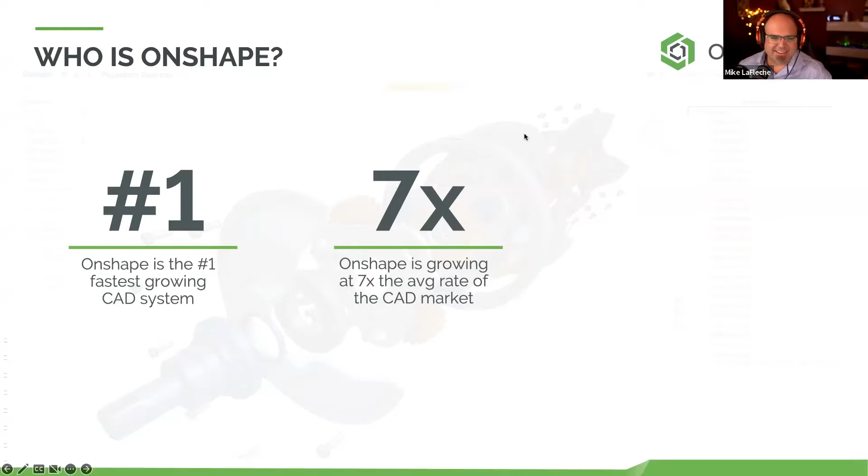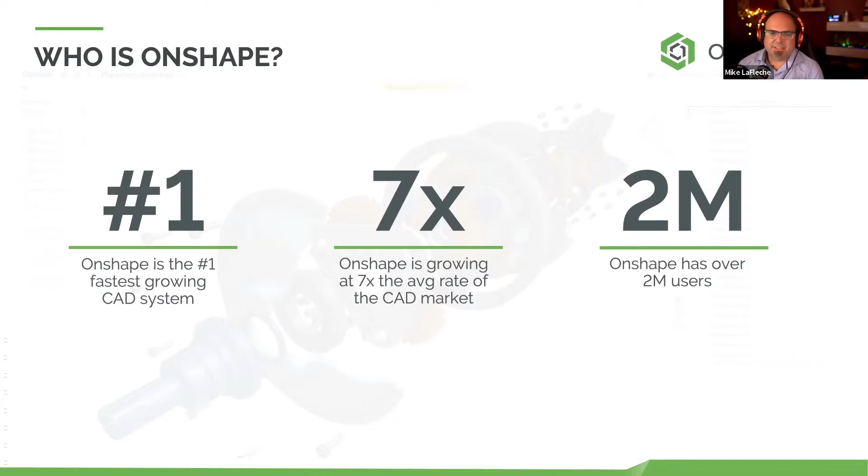Onshape's growing 7 times the average rate of the CAD market as well, kind of feeding into that last theory I just presented. That all adds up to 2 million plus users of Onshape across all industries, from all parts of the world. Many of our customers come from other CAD systems as well, people that have desktop installed CAD systems come into the Onshape ecosystem and have a lot of fun with it.

So let's talk today about why companies are switching to Onshape. And Mike, you being the PLM expert here, there's lots of reasons why people buy PLM, right? Maybe you want to remind us just a little bit about where PLM plays, and then I'll talk a little bit about where the MCAD and PDM kind of play.

Yeah, thanks for the question, Mike. So you mentioned MCAD, and in a lot of products and most products in our community, there's MCAD, there's ECAD, there's software, there's packaging, labeling, artwork, and documentation. That's all part of one big bill of materials.

And so the transition then is on the MCAD side of things. You've got your bill of materials that combines with all of these other elements in one system to manage the whole product definition throughout its life cycle.

Exactly. So yeah, definitely where Onshape is playing, it's the CAD system, but we rethought the way that files and data flow throughout the organization, and we'll show that to you in a demonstration today. We've been able to come up with a way of combining the CAD and the PDM together. Instead of PDM being that separate piece that people are used to installing and managing separately, that is part and parcel of the whole Onshape system.

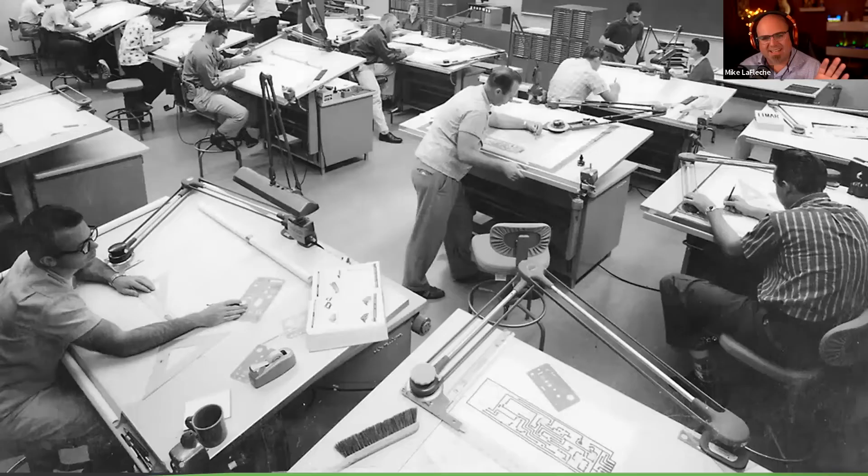So in Onshape, you're always working on the latest version. You have named versions, and we'll talk about this during the demo, but you can actually stack work together. And the reason why you can't do that in most CAD systems - I think Onshape's probably the only system that allows for this truly concurrent way of working, not waiting for people to finish their job before you can do yours - is because all the CAD systems we use today were based off of this picture.

Okay, I mean, I started on a drafting board. That's where I started in school, and that's where I learned how to get into the whole engineering world. So this is kind of a fun picture to look at, but I certainly wouldn't want to work this way nowadays.

Everybody has a drafting table with their drafting tools. You have flat file cabinets. You have an engineering manager back there, a document administrator back there making sure the engineers are doing the right thing with the drawing they're working on. They take it out of the flat file drawer, note who took it out and when, take the drawing over to the blueprint machine, make a copy, and put it back in the drawer so they have the latest version stored away. The engineer takes the piece of vellum, gets their eraser shields out, makes their changes, and then gives it back into the filing system.

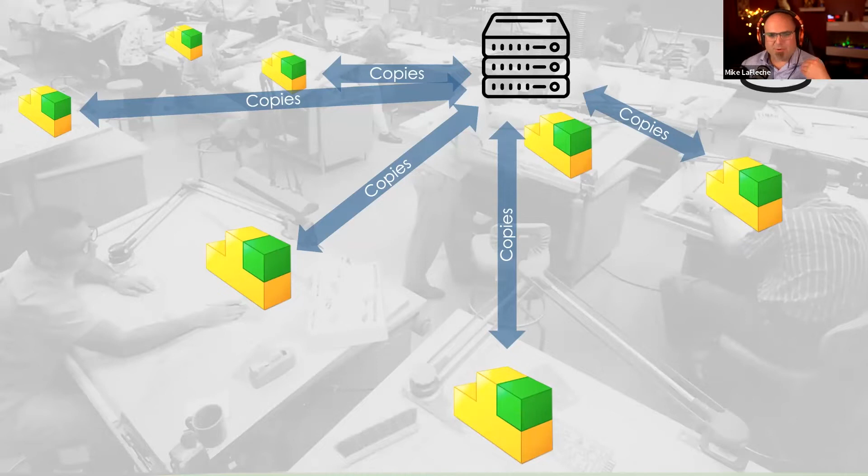And all the CAD systems just kind of duplicated that process, right? You think of C:\Windows file management. When you're dealing with files, especially big, large CAD files, you have to make copies and have them on your local desktop to make those changes. And when you have changes on your local desktop that need to be sent back to the server, that's called a check-in operation or a save operation, but only one person at a time can do any work, even on your top level assembly.

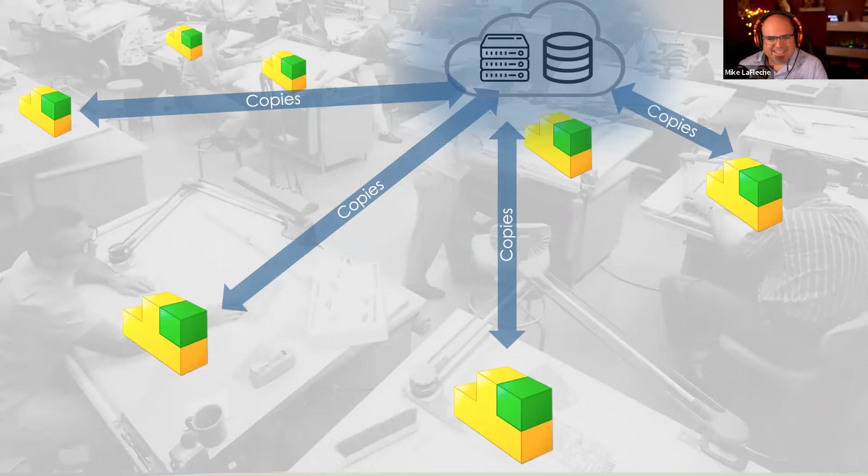And by moving the issue to the cloud, moving the servers to the cloud, that actually doesn't help. You would think, why would I say that? Onshape, it's cloud native. But moving files to the cloud isn't going to solve anything. It's actually going to make the problem worse because the files are big. You're sending them to some faraway data center over the open internet, and it's a huge amount of data going back and forth. Your IT department will look at you really funny when you make this proposal, because it's going to cost a lot for data access between different sites. I've been involved in these discussions, and it never really goes the way people hope they thought it would.

So you could truly have a concurrent design process if you get off of this file addiction that we have as people, right? So if you go to things like Google Docs, do you deal with files at all? No, you just sign in, you have your documents, you share them with the people you want. You can even work together at the same time in the same Google Doc. You've all had that magical experience.

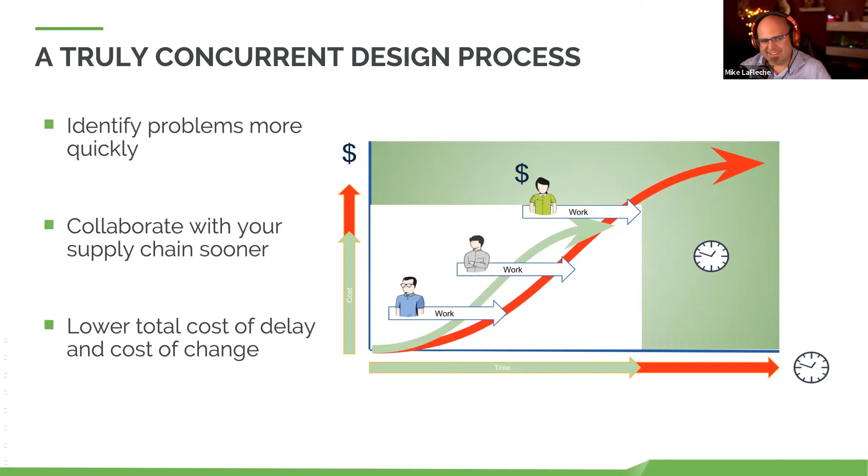So today, what I want to do is show you a little demonstration of Onshape, but I'm also going to show you a demonstration of Onshape connected to Arena PLM, seamlessly. So fasten your seatbelts. It's going to be a fun time, and we're going to have a lot of fun.

So Onshape, cloud native design. We have obviously a CAD system, but PDM is built in. So what does that mean? Let's just slide out of this slideshow here.

And here I am on my MacBook computer, as you can see. I have a phone over here, I have a browser window here, I have another one here. Let's just start here, Chrome browser, right? Nothing special, except that it's a web browser. And here I am inside of Onshape, signed in as a particular user. And here I have a game controller that I've selected, and here's the version history of this.

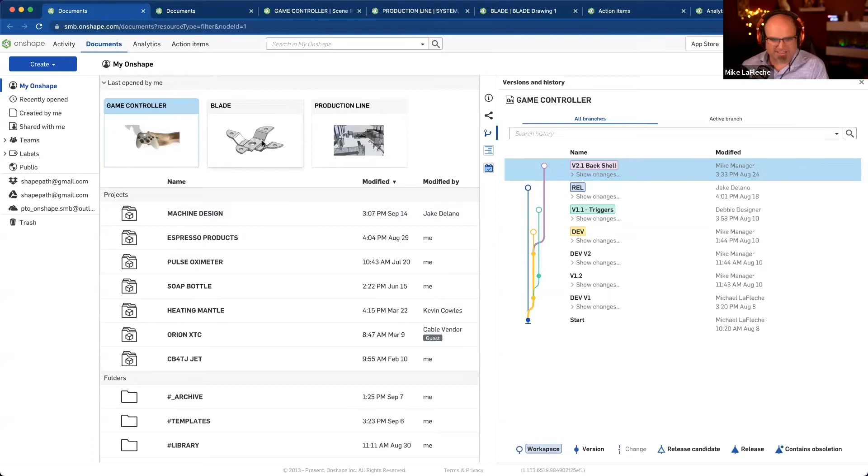How would you actually work in a system like this? We'll give you the story here, but know that Onshape can create parts, assemblies, drawings, renderings. It is a CAD system. So here's an example of a great rendering of a game controller. Here's an actual assembly that I'm going to work through. And I'm just going to zoom out just to kind of show you.

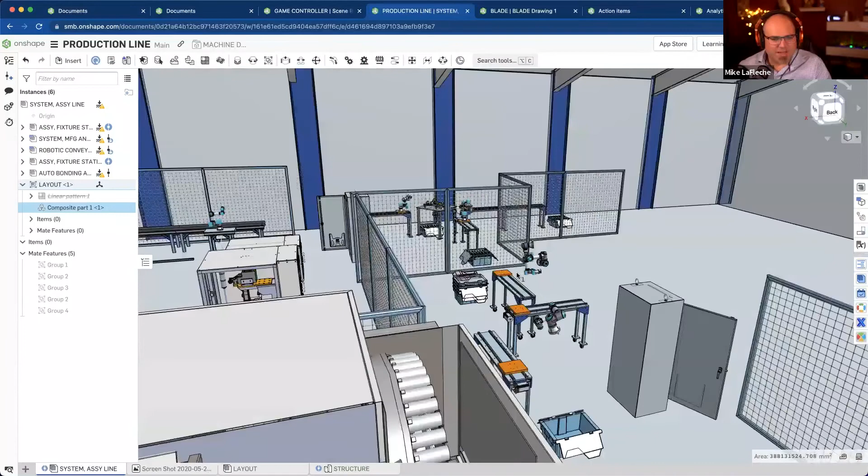A lot of people, when they think of a cloud native system as far as 3D graphics goes, they get a little scared at first. And the reason is because it's an experience they may have had in the past with what a cloud system could be for 3D graphics. Onshape breaks all the rules of 3D CAD as far as the way data is handled.

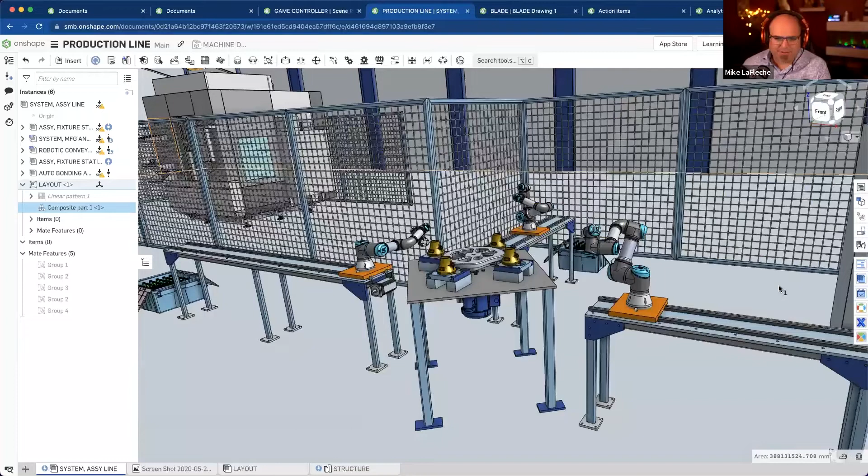You don't have to worry about getting files down to your computer, nor are you streaming anything to your computer. Like, obviously we're in a webinar right now, and that's being streamed to you. But working in a CAD system that's streaming would not be an ideal experience. You'd get dropouts, you'd get pixelation. It would be like watching a movie on an old hotel Wi-Fi connection. It just isn't a fun experience. So Onshape did not do it that way.

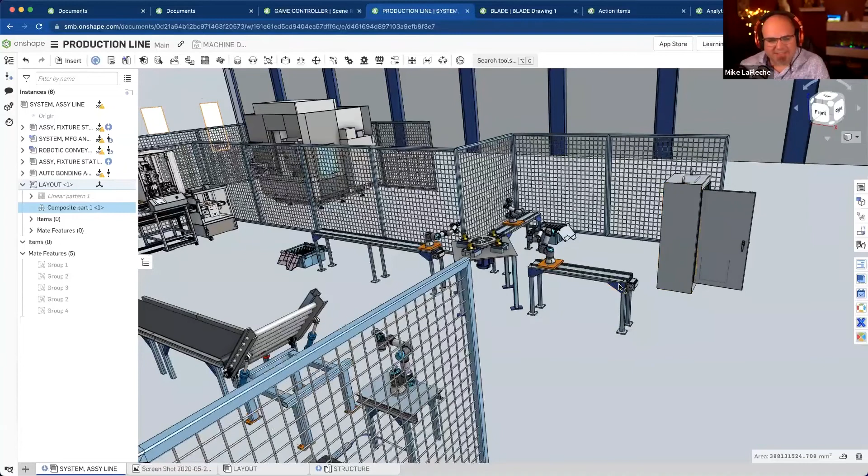All of the data that's needed to construct these 3D graphics in Onshape live in front of you, the browser knows how to build a 3D model. We're just taking advantage of that. So that's the secret sauce of Onshape: when you're working with it and you're clicking the buttons and interacting with the graphics, these are graphics on your computer that the browser rendered locally. So that's why it feels fast. It's not going to feel like an old kind of pixelated experience.

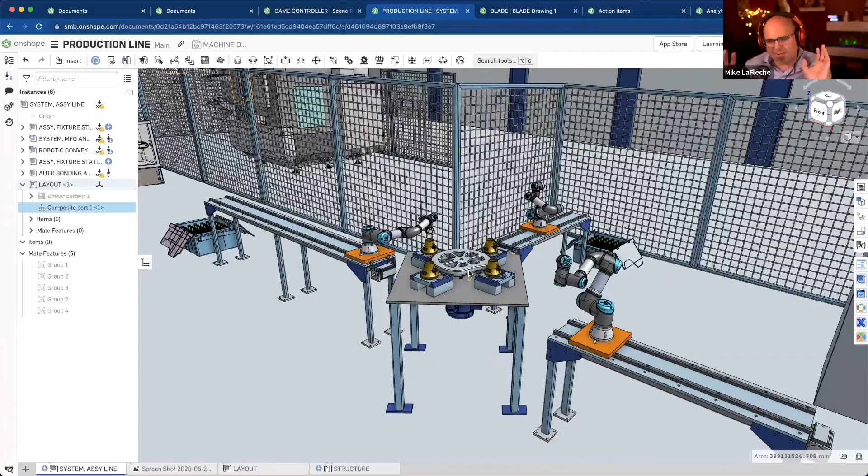And you're going to be able to make assemblies, parts, drawings. Here's like a blade off of a coffee grinder here. But you also get the added benefit of really amazing collaboration here. Here's some comments and tasks. Here's some analytics about what's going on in my engineering department. So for the first time, you're able to understand what's really going on at a company level, down to things going on in your engineering and design organization, much like you would with Arena PLM, right?

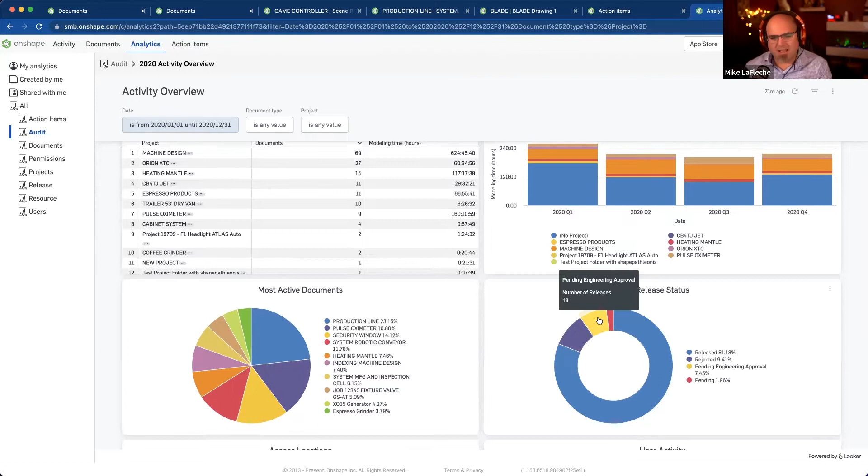With Arena, there's all sorts of analytics and reports. You can probably search for anything you want in the system and get data out of it, right? Absolutely. Same is true with Onshape, but to a degree never seen before in engineering. I can see where my most active documents are, my internal release status for workflows in the engineering side of the business. I have 19 releases pending approval that need to get into the rest of the company and into Arena.

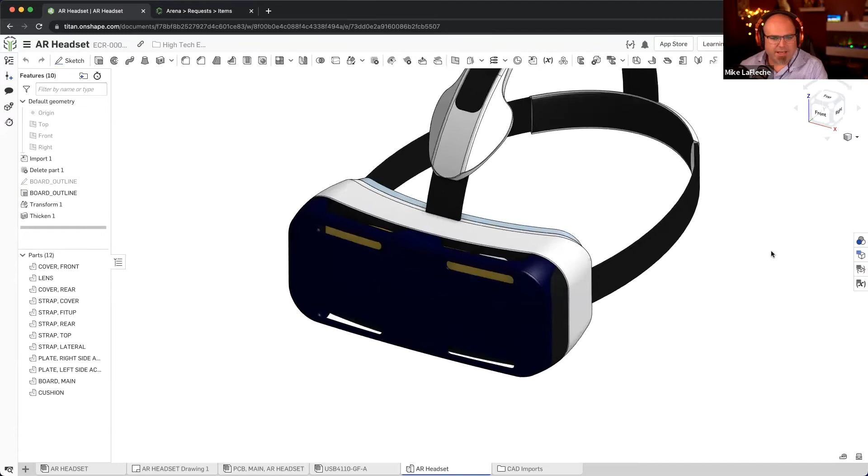So how would I work in a system like this? I have this headset here that I'll work through. You can see how fast Onshape works, right? We're able to jump right through and see the design. There was no waiting or delay as I opened up that design.

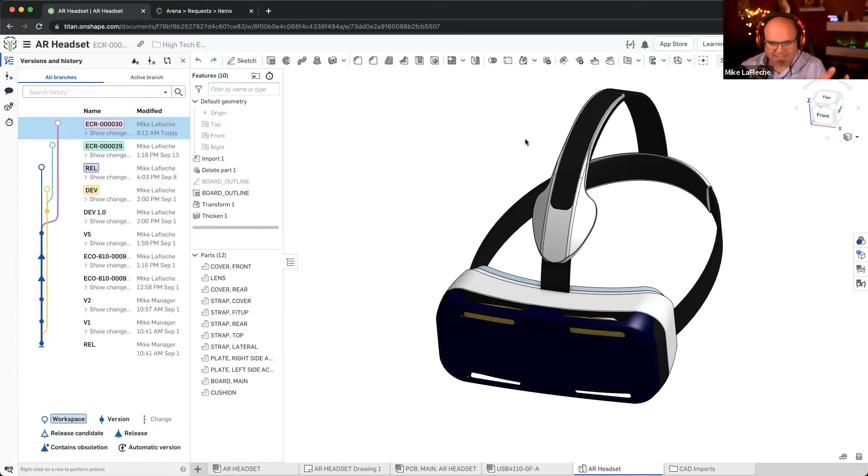In Onshape, you create these things called documents, and a document can have parts, assemblies, and drawings in it. It frees you from having to think in the logical C:\files way of thinking. You don't have to do a lot of pre-planning because of that.

Since you're all probably engineers on this call, you want to see how this works. You create a document—let's say I wanted to create a bracket system. I didn't tell it how many parts, assemblies, or drawings I want. It just put me into a part studio, into a very familiar looking environment.

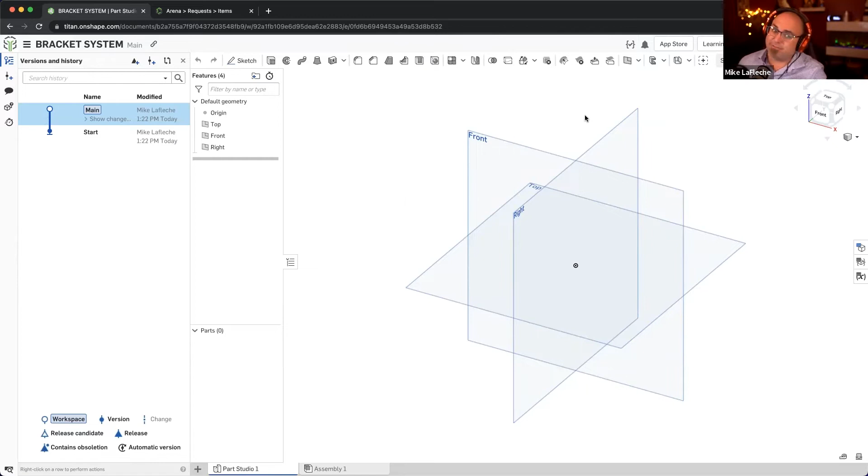And then you just start sketching. So I want a 5-inch by 4-inch rectangle. Nothing earth shattering, except we're doing this in a web browser on my MacBook computer natively. I'll extrude that 1 inch.

Turn off the planes with keyboard shortcuts. I'm going to create another extrusion, and I'm going to tell it to be a new part. This is where we start getting different, because the database is keeping track of everything that's going on. Here's my base plate.

Just like that, I'm renaming the part. And then right here, we'll call this the top cover. Very easy to get started.

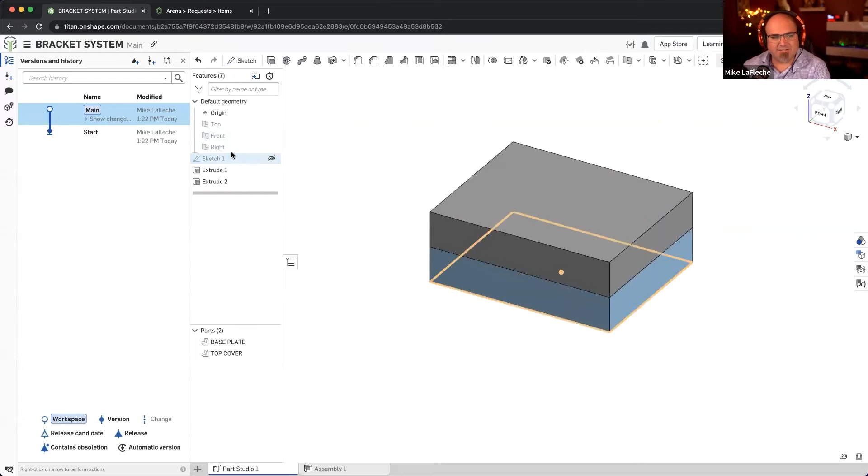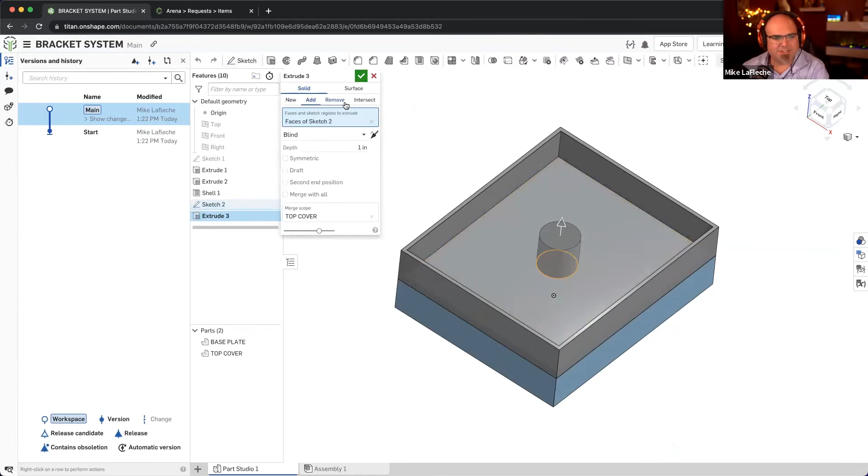Of course, everything's parametric, sketch-based modeling. If you make design changes, you see everything updating. You're able to drill parts through multiple places, hollow this part out and that part out. You want to drill holes through, sure, go for it.

It's all what you're kind of used to in a parametric, feature-based design system. So I just drilled through the top part, but not the bottom part—that's what I told it to do. And this whole time, I've been keeping track of it.

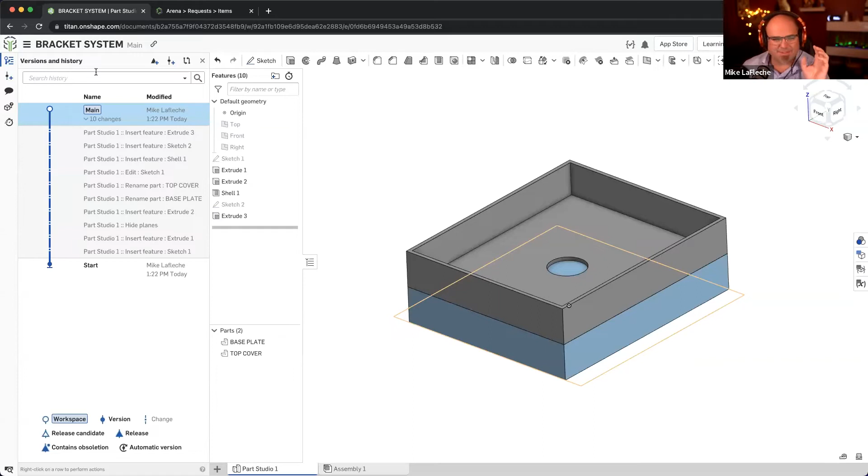You notice that I'm purposely waving my left hand the whole time. I've gotten into this habit when doing a demo, because usually your right or left hand—I'm right-handed with my mouse, though it's reversed on the computer, probably because of the video—this hand is free to move about the cabin. Meaning I'm not hitting Control S on my keyboard every time I'm making a change. That's something very freeing. I'm able to use this hand for drinking coffee, drinking water, or just waving at you, because everything is being recorded.

We can label versions in time for important points during the design process. This is just version 1 of the design—we're not releasing it at Rev A yet. We're not ready to go to manufacturing yet, but we have an important milestone in the design. So that's kind of how it works.

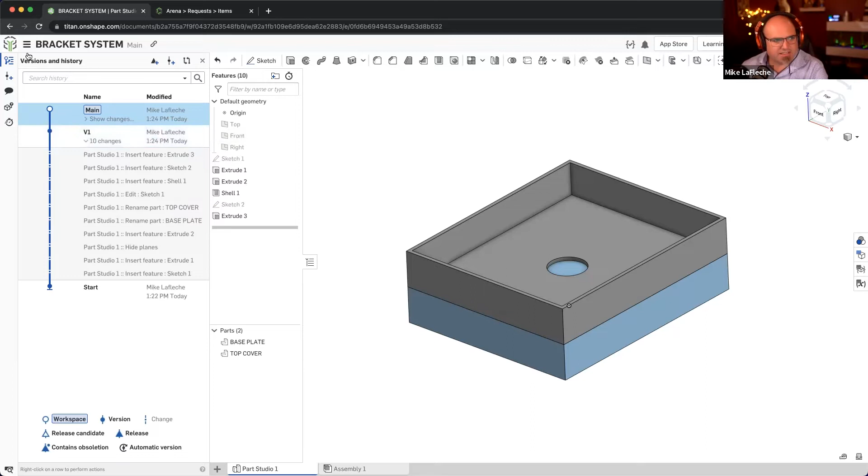So let's just go back—click out of there, go back to the headset. This is what we're going to be building. I want to build this cushion here. So let's go to a fresh document. I have something ready to go here.

Do a VR headset instead, right? I think this is more of a VR headset anyway.

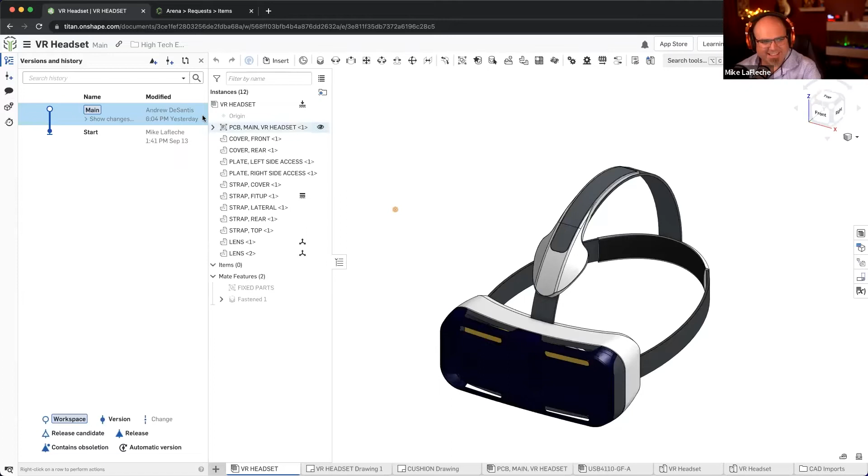In this design, I have a comment from somebody here in Arena—we have an engineering change request. I've been learning Arena thanks to the help of Mike and friends over on the Arena side of the business. I have an engineering change request here in my Arena instance, and an item number related to that change request. So this ECR, I actually want to use as a way to make the proposed changes here in Onshape.

You can see that this is showing—let me just go back here and look at this. Early testers have said that the headset's uncomfortable. A cushion of some sort might help with this headset. So here I am.

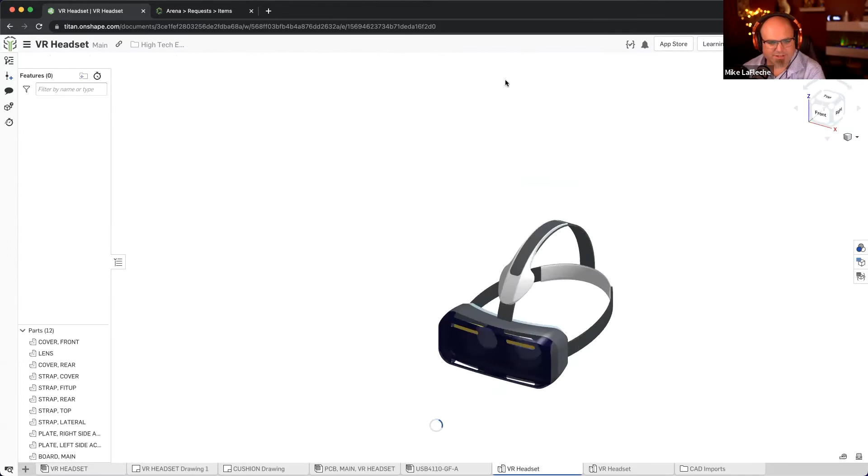Here's an assembly, and here's the part studio inside of Onshape. Let me create this from scratch for you. All right, so you can see my timeline here.

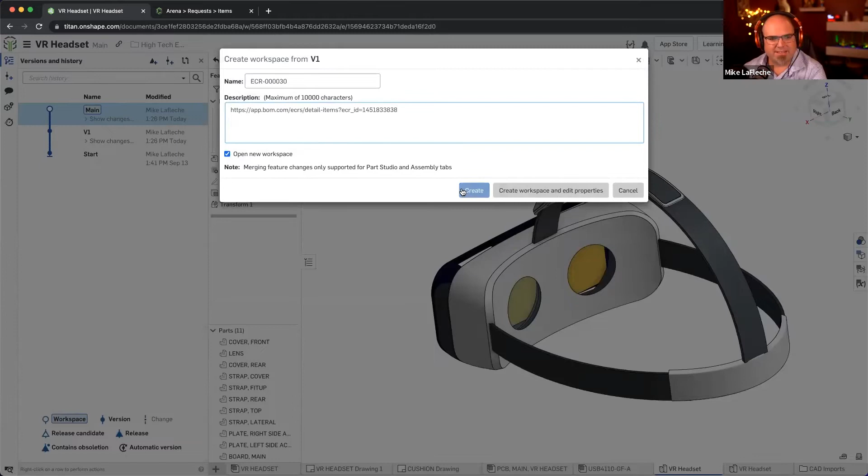I've made a few changes. I'm going to create a version here in my timeline, and create a branch from this point, calling it out as the engineering change request from Arena. I could even put a link in the description back to that ECR. But instead of doing a file save-as copy or a pack and go like you would in SolidWorks or any other file-based CAD system, here I'm creating a logical branch in time to make these proposed edits, instead of doing it on the main timeline.

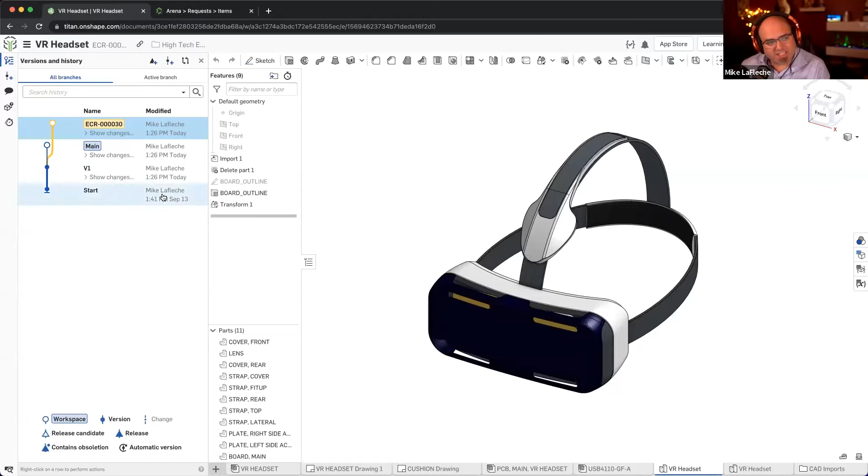For the engineering change request, we have the action. Mike, this looks like a pretty good opportunity to add a cushion here and here. This is Onshape, and it's pretty easy to do this, right?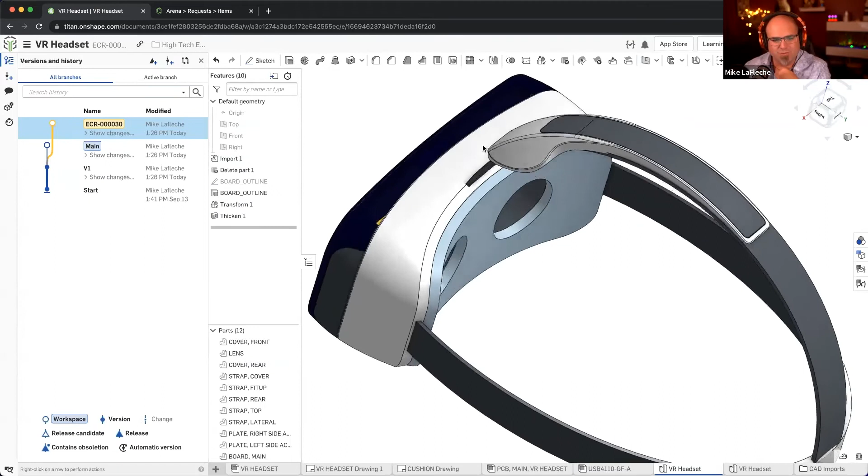I'm just going to create a new part that thickens the surface by 5 millimeters. Hopefully that looks a little more comfortable. Maybe we should round it off, huh, Mike? We'll go ahead and make this change, make this 2 millimeters, or I'll go at 1. That looks pretty good to me.

All right, so we have that fillet radius in here, and we have this part that was just generated in this parts list. It's automatically giving me a new part. I didn't have to create a new item record or anything like that—it just does it for me because I told it to create a new part when creating the thicken.

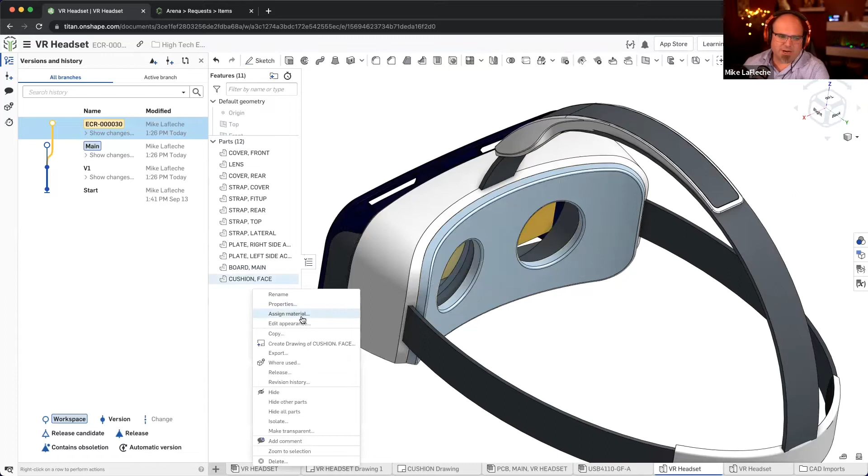And we'll call that the cushion, comma, face. Let's see, we should probably make this out of something. We'll make it out of some sort of rubber. I'll filter it on rubber, and it shows me all the rubbers in my database here.

I'll say it's made of neoprene, so I get the right density. In fact, in Onshape you can pull out these special tables that will give you an idea of how heavy all the parts are in this part studio, and I can see everything has a weight except the circuit board, which I haven't finished yet. So the cushion—I can see that it's right here, made of neoprene.

The other thing I need to think about is, where are we going to get a part number? What's the category of part? This is very familiar if you're an Arena customer, categorizing things in the system. Onshape has a similar categorization function, and I want to make this out of some sort of fabricated—I guess plastic would be the category for a rubber piece.

Onshape has a part number generation capability built in, and this is something you can set, but it's a very simple part number, serial number generator—it's not looking at the category. Arena PLM does have sophisticated automatic part numbering based on category, and I can click on that hashtag right there, and it gave me the next available part number for a fabricated piece of plastic from Arena, right?

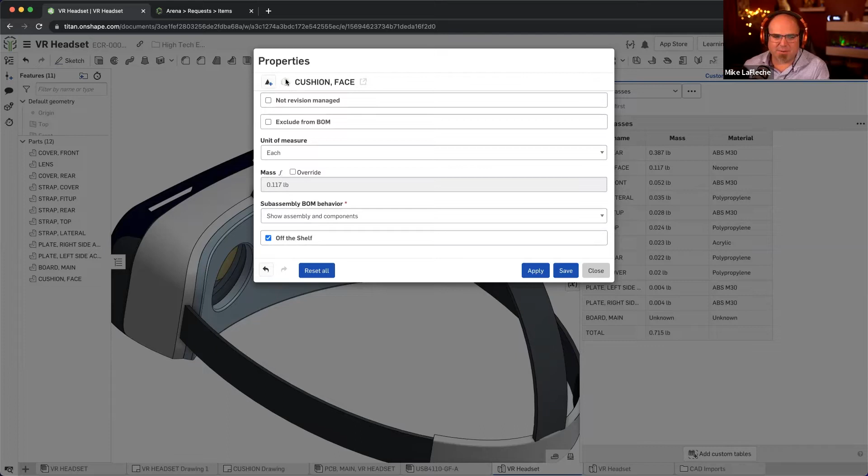That was pretty easy. I didn't have to type in a number, making a mistake. Everything's here—all my other properties are here as well, automatically being calculated. You can customize these in Onshape, of course, as well. But you want to have the properties that are good for MCAD here, the properties that are appropriate for the rest of the enterprise and Arena in Arena.

So I'll just apply that change. The cushion, face cushion's here—we got a part number. And by the way, if I go back to that property screen, look at what we have up here: we also have a sync to Arena button.

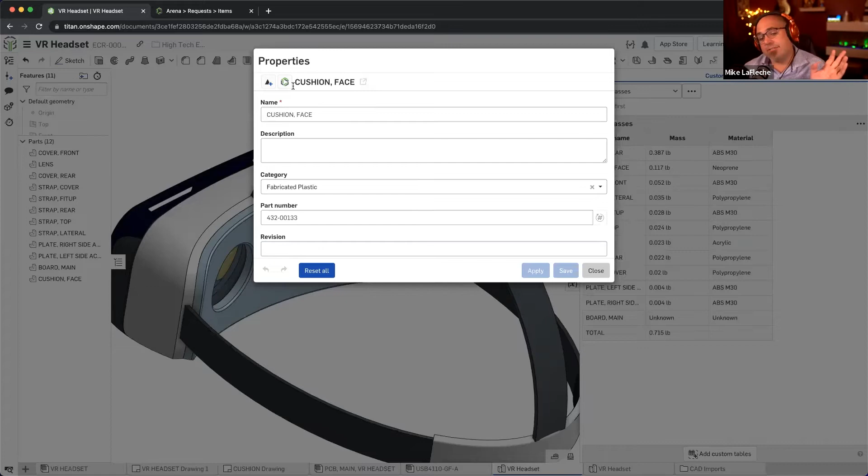And what that would do is take this current state of the face cushion with the part number and category and just stick it in Arena, right? I could do that right now if I wanted, but I'm going to wait because I have a couple other things I want to do with this.

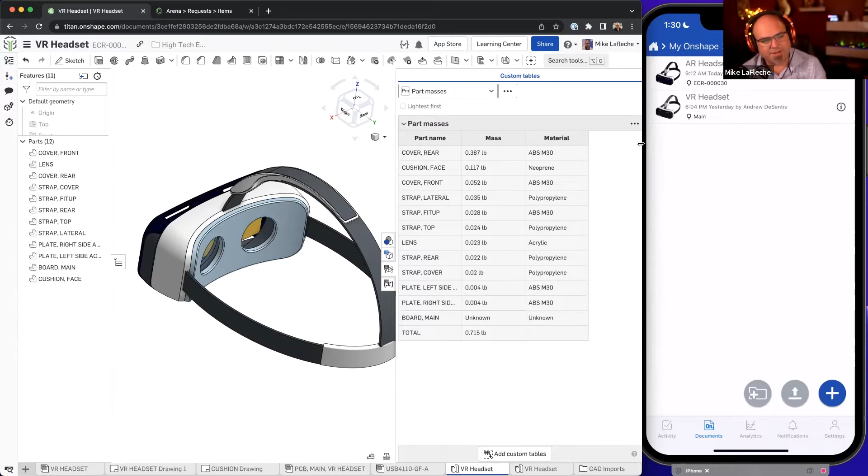Let's go to the assembly. Actually, before we go to the assembly, I want to get some feedback from a design colleague who's out in the field. So Mike, I'm going to pretend you're out in the field and I'm going to give you an iPhone. This is my actual phone, and I have an app that I can broadcast my phone to the screen here—that's just for the sake of movie magic here, right? But I'm really operating this. So I'm going to go to my VR headset, and we can pretend that's Mike. But look, I'm able to get to this on my phone.

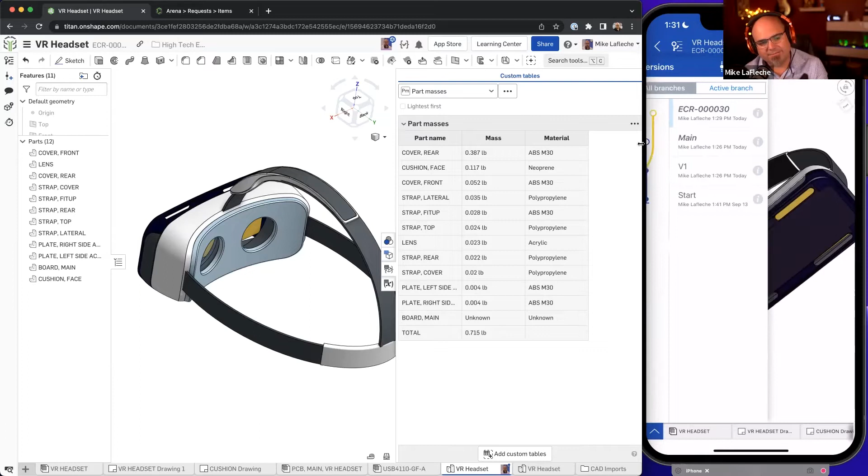Full CAD system, full PDM system on my phone. I have the full history. You can see that I'm in that ECR 30 that we had defined in Arena, right? And I can even see the other people in the document.

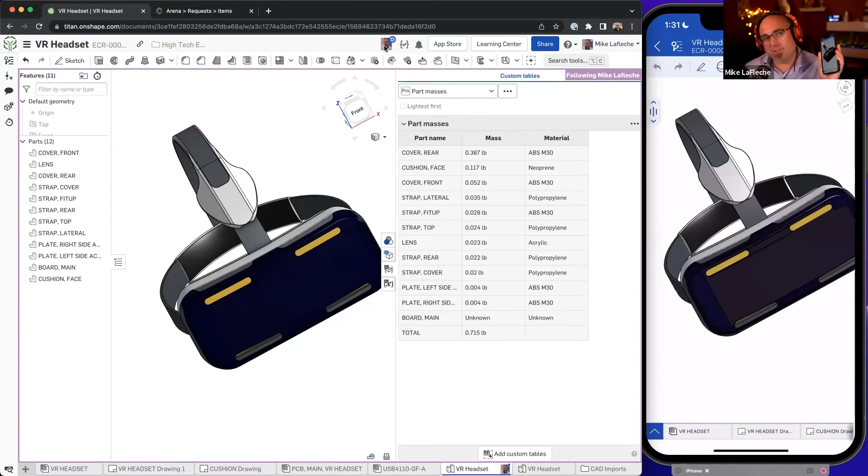There's a little note here that we have another collaborator. If I really wanted to see what the person on the iPhone was looking at, I could double click that person's head that appears at the top of the screen here, and you see the view position changed automatically.

And this is now a live design review, right? So what was the first time you saw this, Mike? What were your thoughts when you saw this follow mode in Onshape? So obviously something very cool. The first time I saw this was over 10 years ago.

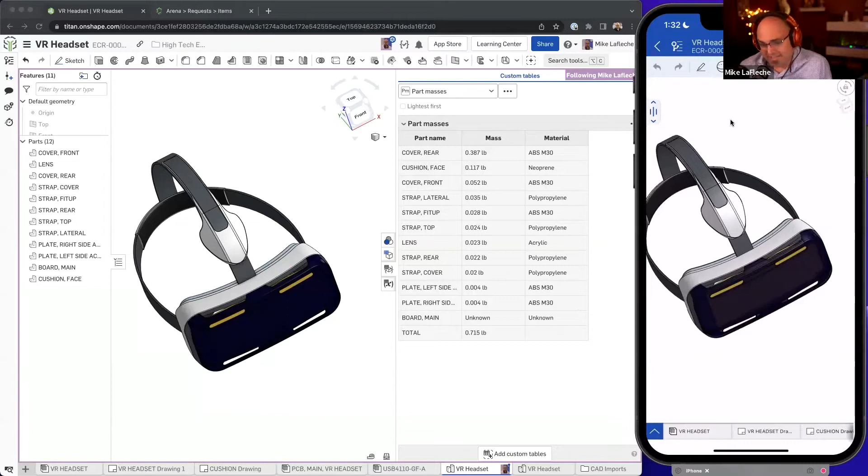So this has been built into Onshape right from the beginning. We built the kind of infrastructure of Onshape first before we started building up all the CAD functions. We had to build the foundation, and these design review functions are amazing for design reviews, interacting with your suppliers, customers. You could be out on the shop floor, as long as you have some internet connection, whether it be 3G, 4G, Wi-Fi. It doesn't need much.

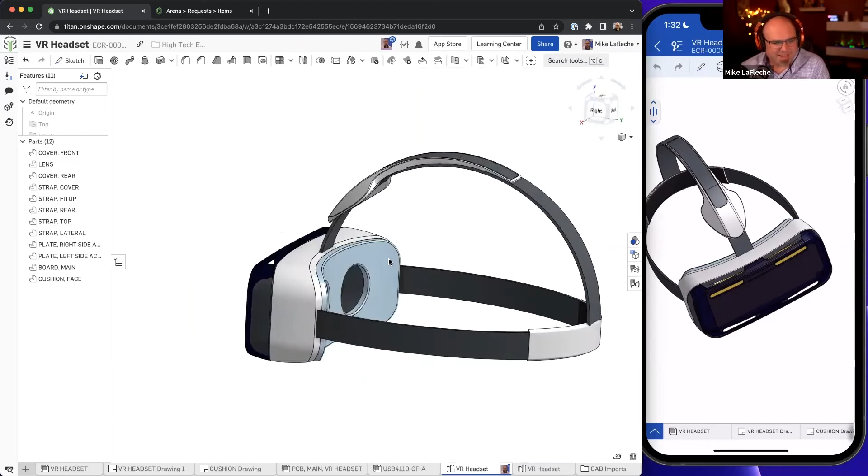Works on hotel Wi-Fi. I always love to bash the hotel Wi-Fi for some reason, but everybody knows it's slow. And it works. So we're able to have these live design reviews and even provide comments back and forth.

So here I am on my phone still, and I can add a comment. This looks like a super comfy cushion. So I'm adding comments now, just got to hit the add button. There we are.

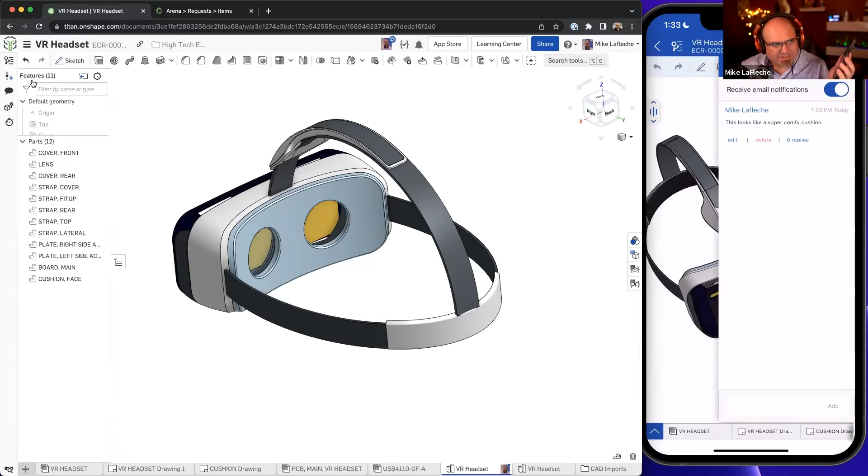And that is automatically here as a comment on the other browser too at the same time, right? So you're able to have this asynchronous or synchronous kind of communication moving around.

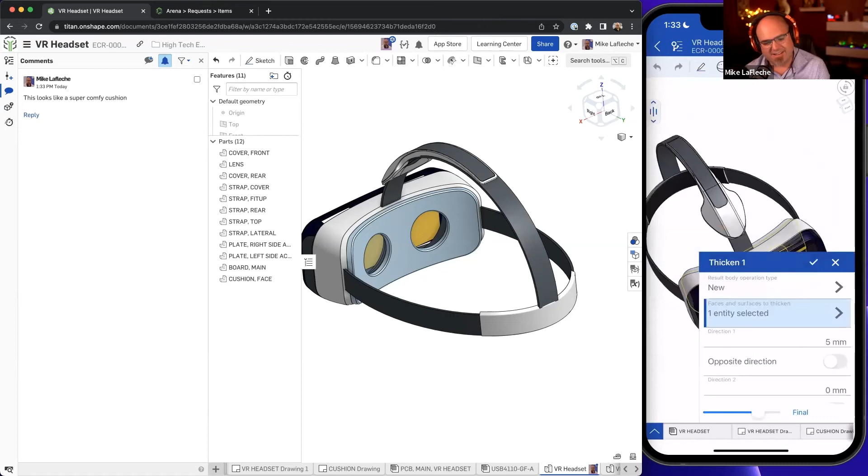And because this was a full CAD system, I have the full feature tree on my phone. If I feel like it, I could change the thickness of this. We'll call that 5 now instead to save some material. And that's automatically up to date on the browser at the same time, right?

And we see who's doing what and when. We're making all these changes live, right there on the timeline. And of course, you can label versions along here too. I'll just call this ECR, I'll just call it V2 in here. It doesn't matter.

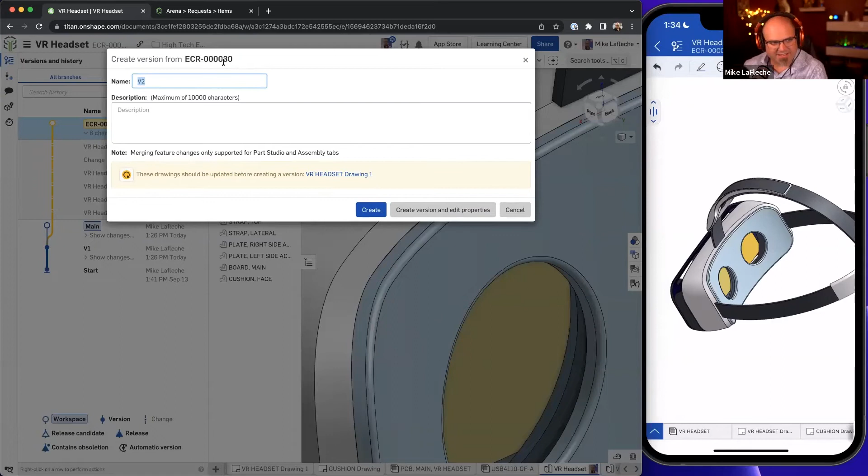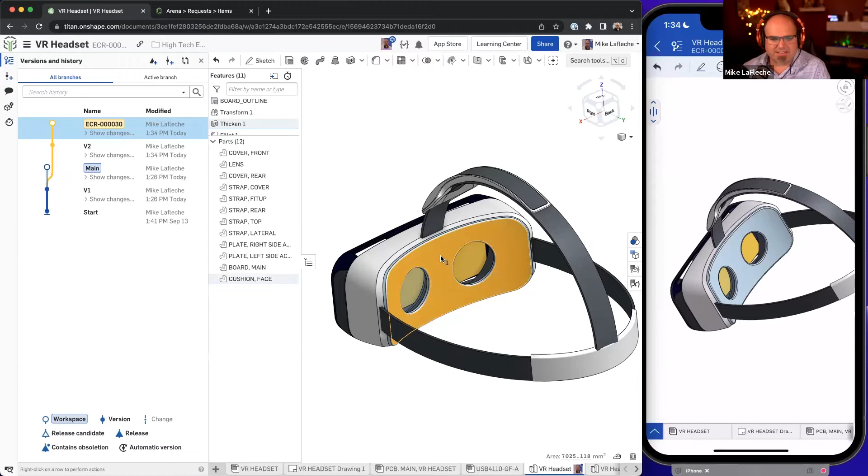All right, so we're getting to the point now where we want to make a detailed drawing and release this to production, and then get us all synchronized to the Arena system. So we're going to connect it all. Let's make a drawing. Everything needs a drawing, right? So I'm going to make a drawing on a B-size piece of paper.

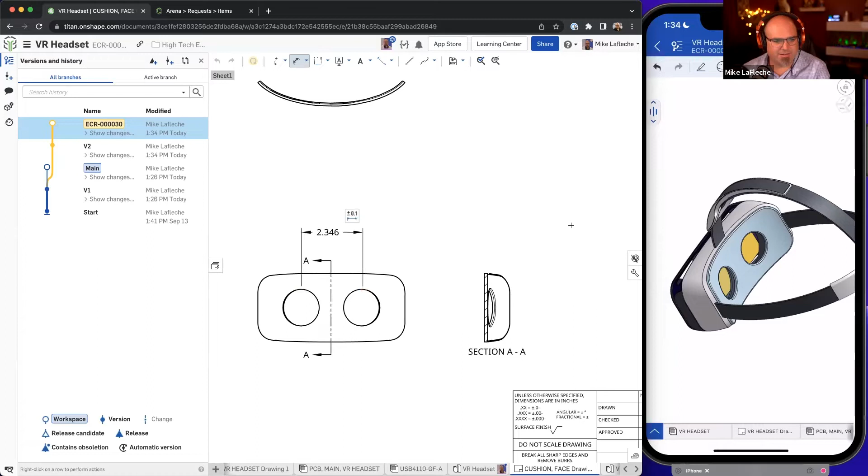All right, there we are. Pretty slick, you do all your things to make it look like a real drawing, right? I'll just do a quick section view down the middle of this just so we can have a section view and stick a dimension or two in here as well. Of course, you have your tolerances and stuff like that, just like you would expect of any MCAD system.

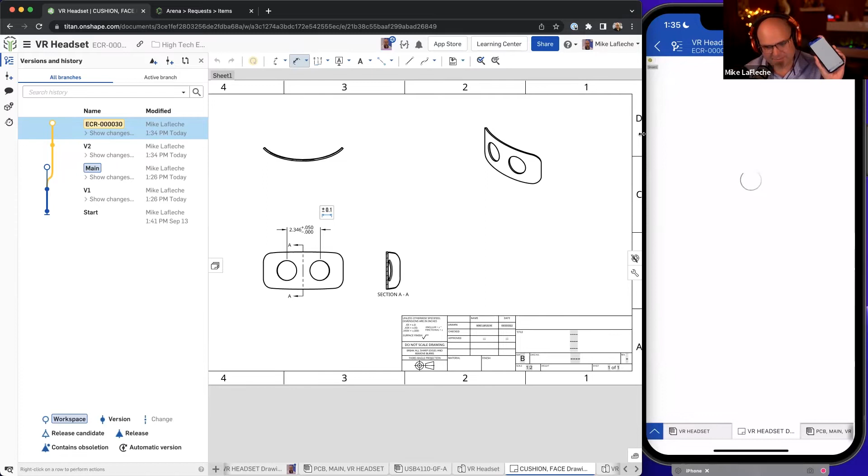All right, we'll put a drawing table in here too. Hey, by the way, I can go to my drawing on the phone in real time. So if I'm out in the field, I can see this — there's the first drawing of the top level assembly. I'm able to get to that, right? So it's all here.

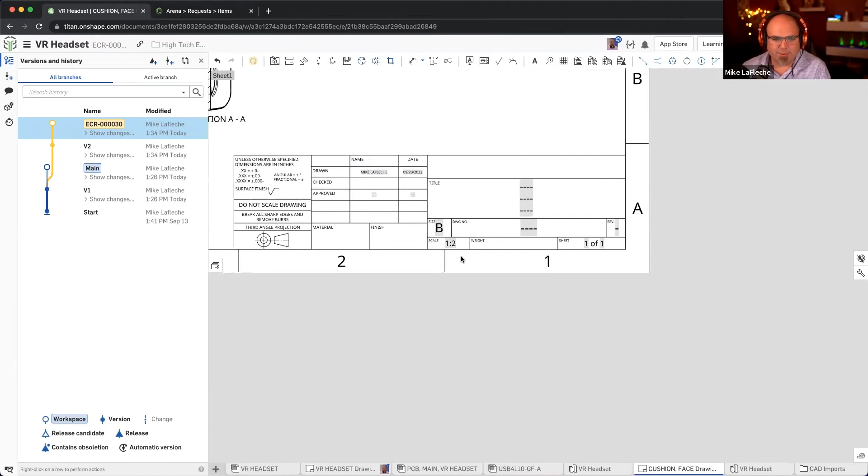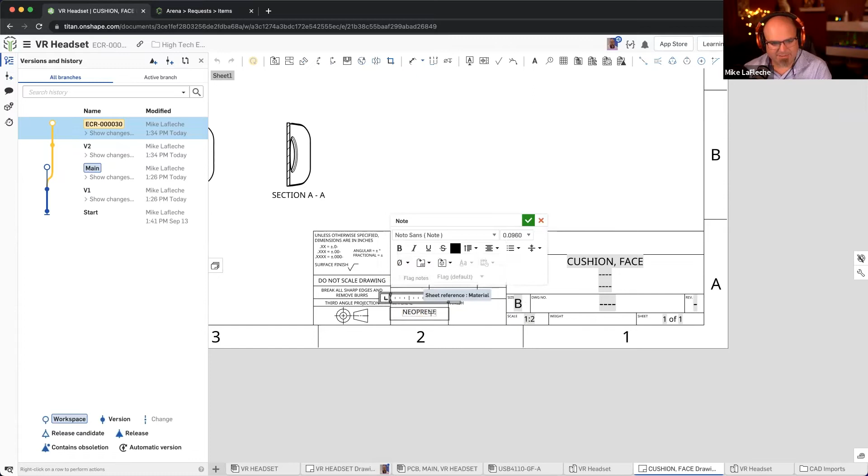All right, let's just hide that. I want to release this to production. All the properties can be set to metadata, right? So it's important when you have PLM to know that all these capabilities exist here. So there's the name of the part. Of course, you would have this automatically set up in your templates before you begin any kind of implementation. I'll set the material, and maybe I'll put the weight in here as well.

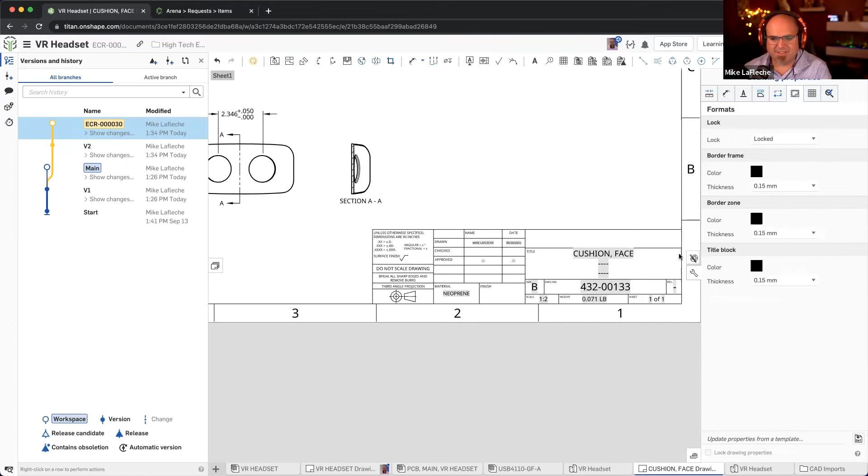It even knows the units that you're supposed to be using. And then finally, part number, the one we got from Arena, right? And I'll just lock this template so I don't accidentally move any of these text fields around. But that's as easy as it is to hook these fields up to a data property. These properties are pretty common across all systems, right?

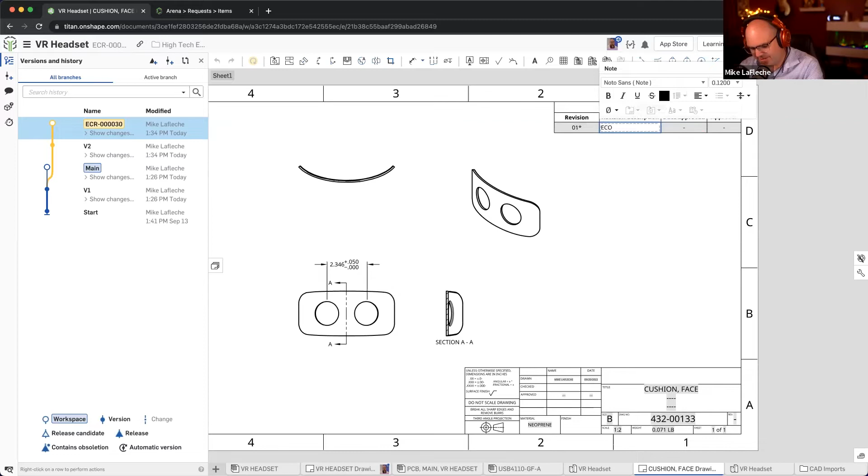One other thing, stick a revision block up here in the corner. And it's fixing the release at revision 1. And I want to release this under ECO 29, right?

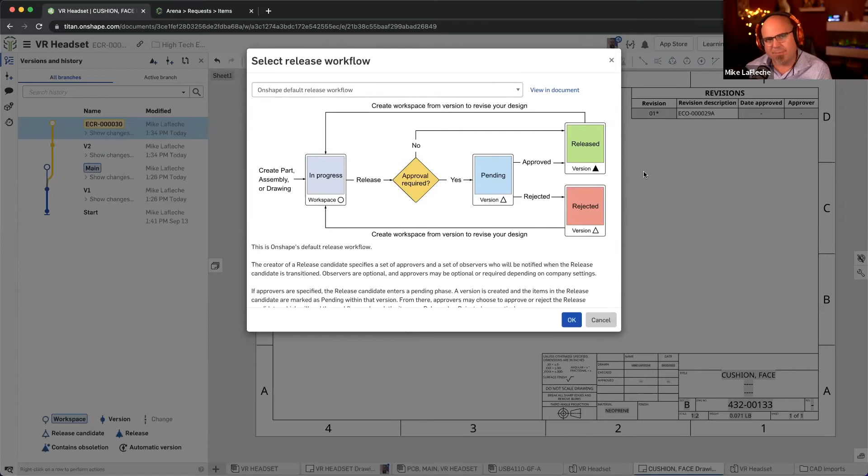All right, so we're ready to release that. Onshape actually has a release management system built in for managing all of the MCAD-specific PDM information, so you would just push that through the PDM process.

It's sticking revision 1 on here. Of course, I could have the same part number if I allow it. In my company, I don't allow that, but maybe drawings are 800 numbers instead. And then I can say that this is the release name right here.

And who's going to approve it? Well, I can have anybody here in my company approve it. I could have Mike Halliday approve it if I wanted to. Maybe I'll just let you know that it's happening here, Mike. And I will approve it. There we are. And of course, you can put in release notes, cushion for comfort.

And I could submit that for review. So what's going to happen when it's in that review process? There it is, it's putting a triangle in here. It even put in a rev block automatically for me on the drawing. How about that, right? We're thinking of the whole process.

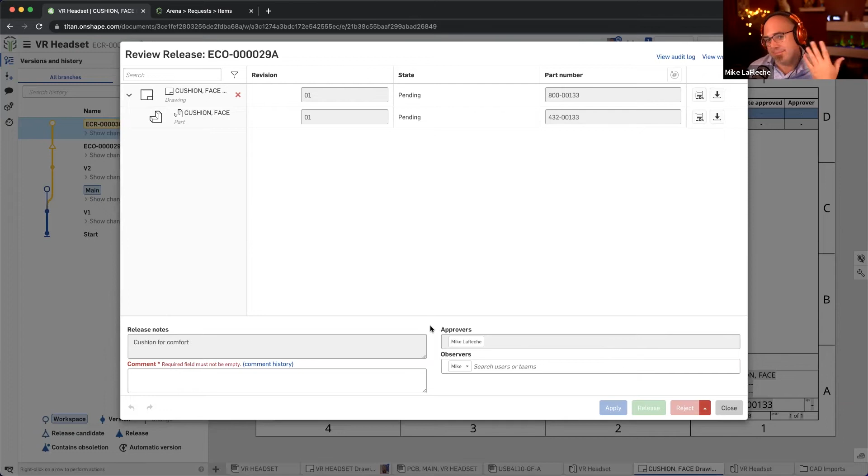And I can go to that pending release and go ahead and release it. Now, in my case, I'm not a manager level enough in this system to release it myself as a self-approver. So that's actually one of the benefits of the system, is you can put on all these rules. All of these things are here.

And I'm going to get to those things in a second because I want to show you some of the settings in here at some point. But before we get there, I want to just review what you saw first and then talk in detail about the connection between the systems.

We've seen CAD, no install, no file copies, everybody's working together, which enables you to work faster. We're able to work in parallel, which is obviously faster. We're able to work on any device, any modern device. You saw an iPhone, you saw a MacBook computer. You can work virtually on anything, as long as it has a web browser and a good internet connection.

It helps you with product quality because you're not going to be worrying about these file copies. It's a very freeing feeling when you're using the system. Just like with Arena PLM, you sign in, you get your work done. You didn't have to think about standing up data stacks and worrying about where all your backups are. It's not a thing you think about. But I bet you're thinking about it now with your CAD system that you're using today.

So with Onshape, you also have that same freeing kind of feeling. With the Onshape Arena connection, there are going to be similar kinds of feelings. You're going to have better continuous improvement. You're going to be able to have simplified collaboration across the value chain.

How does this work? Well, I think you've seen a little bit of it already. You have Onshape, you have Arena, and you're able to have this nice real-time design access between systems. You saw me pull a part number. You're going to see me push information to Arena shortly, including bill of materials data, 3D product visuals, thumbnail graphics for your bill of materials. And then you're going to see Arena also sync data to Onshape, like the part number. So you have a continuous loop of feedback now between the different systems.

So if I go back here, it's so easy to set this up. All you have to do is map the properties from Arena to Onshape. If I have an electrical part in Onshape and it's categorized capacitor in Onshape and it's categorized capacitor in Arena, that's it. It's not a lot of setup to do this.

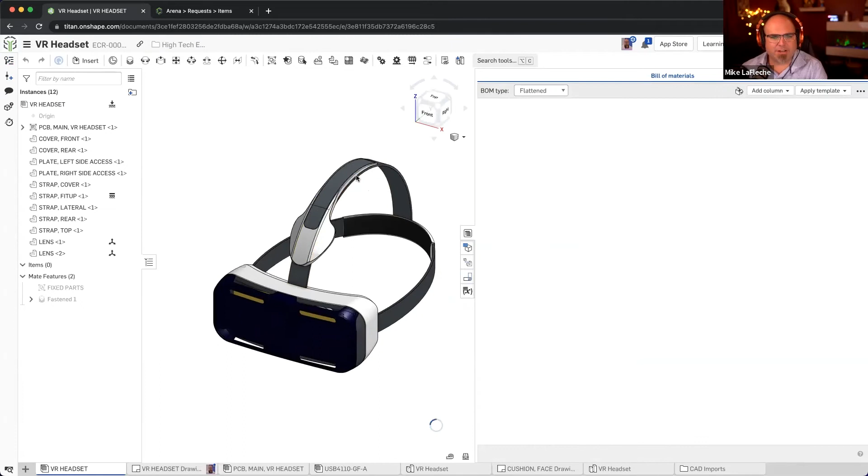It's really pretty easy. So let's go back to our VR headset. We're going to go to our assembly. And the cool thing about Onshape assemblies, first of all, let's do this.

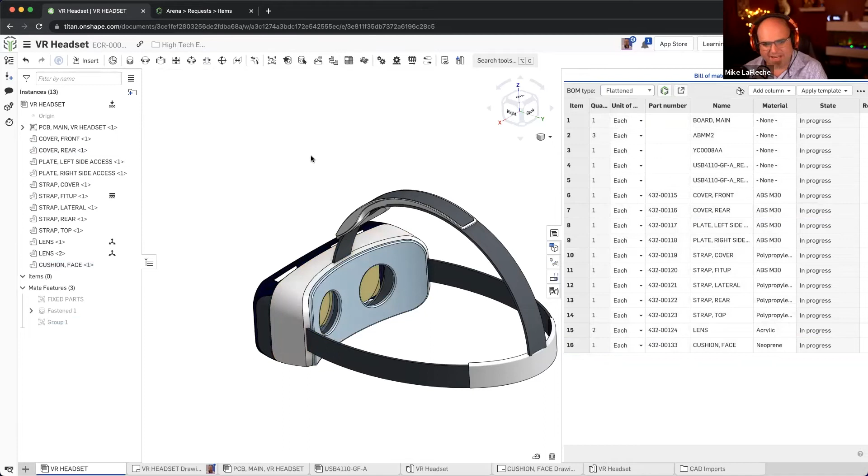Let's actually add the cushion to the assembly. You saw me working on the part studio where I was working on all the parts together. But here's the face cushion added to the assembly. I need to mate it to this. The only thing I have to do is really group it to it. I don't have to fully mate it because I designed it in the context in the part studio. But there's the face cushion right there.

By the way, I could insert any other part. You go to your libraries in Onshape and you can browse for things and search for things very easily. But I have that placed here. It's in my bill of materials, as you can see.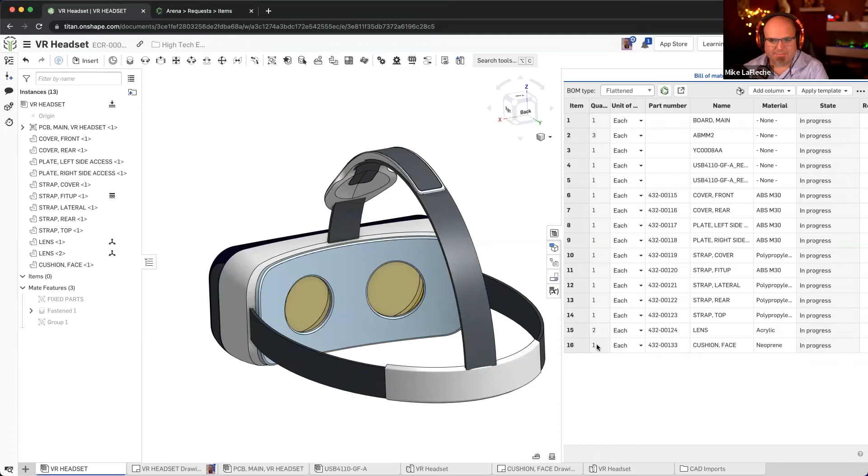Go to the structured BOM, and I can see at my structured BOM level I have part numbers already set for a number of these. For the sake of this, let me show you this. I had part numbers already here, but I'm going to clear these out.

I'm going to leave the cushion one because I just got that recently. But I'm actually editing the BOM from Onshape, right? This is just the information in the Onshape data storage. I want to get part numbers for the rest of these items. I could just generate them right from here, and those pulled from Arena as well.

Okay, just in one fell swoop. Now that that's there, I have my unique part number at the assembly level, of my unique part numbers at the part level. And of course, a new part that I've just created, I have this button here where I can just go ahead and synchronize that information to the Arena system.

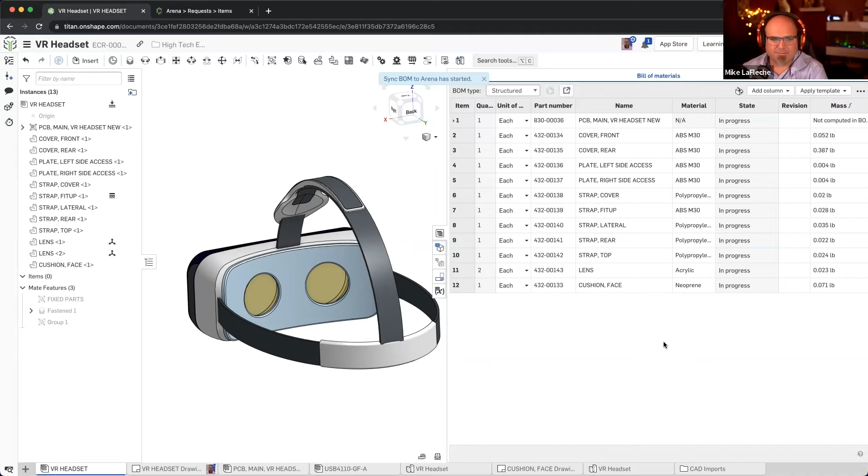So it's as simple as that. It doesn't hose my system while it's doing things. It's not seizing things, it's not taking my computer over or any other computer over. It's just doing this in the background.

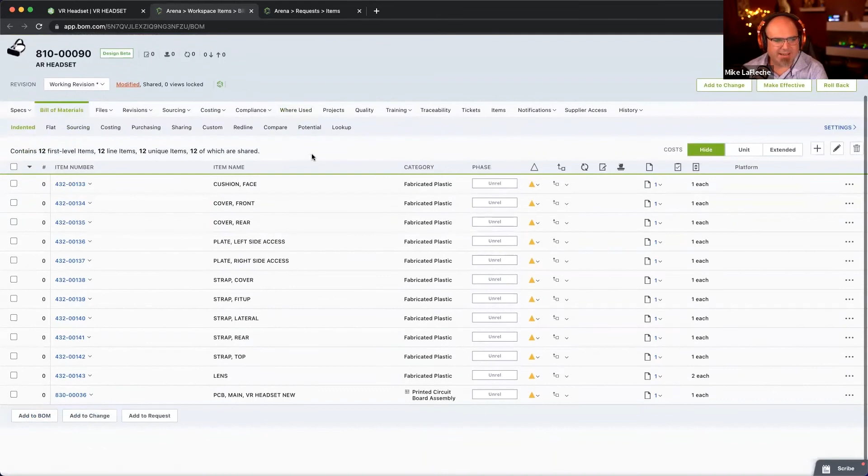So I can go to Arena right here, and I have a link right back to the Arena system, to the bill of materials. I'm going to pick this view of the BOM, there's different views of the BOM you can look at. And if you see that is a full bill of materials of what I just brought over. All I had to do was click on that button right here to open it - it's just a hyperlink into Arena.

So what would people do with a bill of materials in Arena, Mike? Like this is something that I'm still learning personally. But you could share this with a supplier perhaps.

Great question, right? One aspect is supplier collaboration - you have supplier licenses, suppliers can log in, they can see this new information in Arena. But it's also the platform for sharing it outside of engineering with the rest of your own internal enterprise. That's where everybody else gets involved in it.

So you ran through a release process on the Onshape side - that's a departmental release. Now you've basically released this as a release candidate to Arena, where the rest of the enterprise is going to have a chance to review it and approve it for the official release.

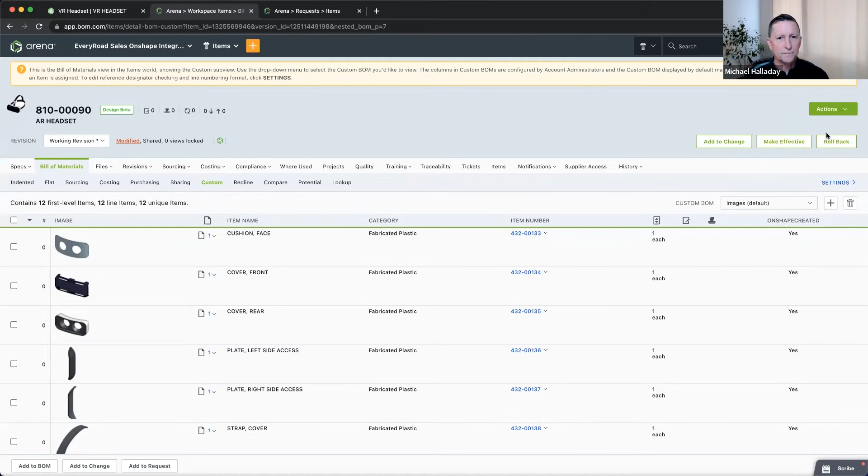Exactly, I love how it puts these nice thumbnails in here, it makes it very clear what you're looking at. When I show this to people, this is something that gets a round of applause typically, or a wow. You're able to see the BOM with a nice thumbnail.

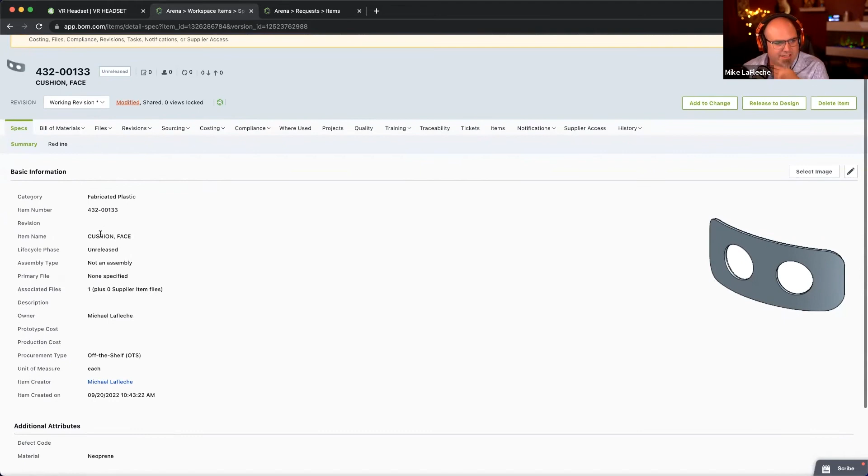Obviously, I can jump into the item itself, see that graphic and all the metadata that I had decided to push through. And if I click on this graphic, we have a lightweight view of that particular item all by itself.

So this makes it really nice to be able to share and not worry about which person has what viewer installed. Everybody has the viewer because it's part of the platform.

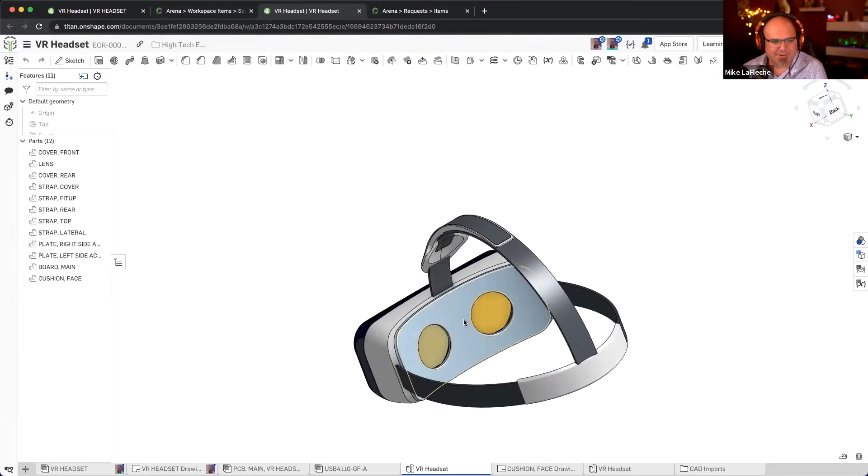I could even click this button here and bring myself back to the Onshape system to see this in the context of the assembly here. I can isolate it just to kind of see it, but that is essentially how quickly you could get back into Onshape from Arena if you're somebody who was an Onshape user who wanted to get more information about the design - you want to do a measurement, see the length of that.

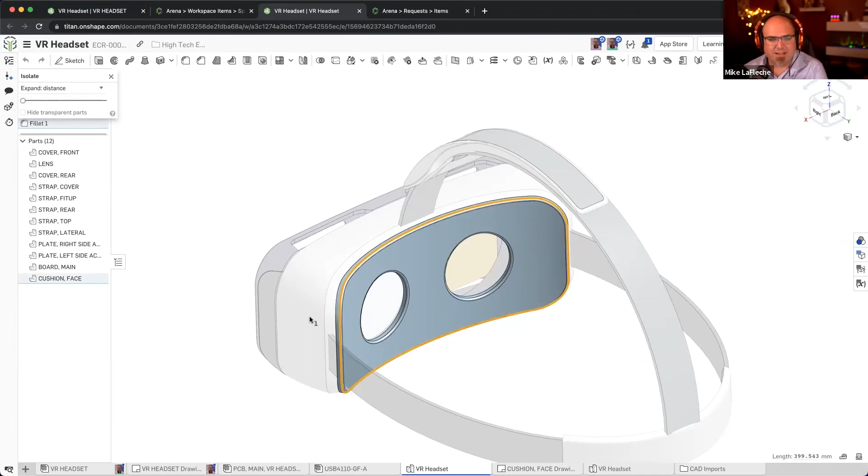Bead right there that we need to apply, or take a look at how it's fastened together, or whatever it might be, where you need more detail. But it's as simple as that, getting that data back and forth between the systems.

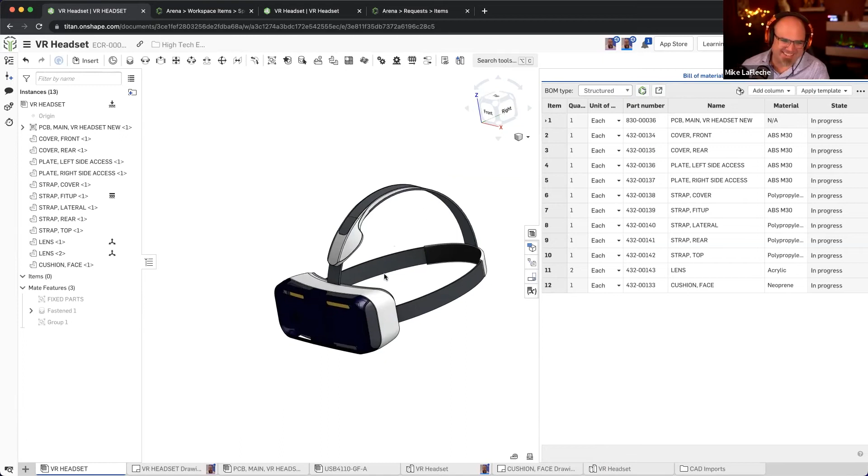It's pretty simple, it's pretty simple. It's amazing to me that it can be this simple, and the setup is even more simple because, like I said, I lost all my hair keeping all these kind of systems up and running when I was a design engineering kind of manager person out in the real world, keeping all these PLM and PDM and ERP system connections up and running and talking to each other, and only changing every 2 or 3 years because you didn't want to go through that process all the time.

A big rollout of CAD, PDM is something you have to plan for and test and make sure it's going to go well. Just all that doesn't happen anymore with Onshape - you just don't have to think about it.

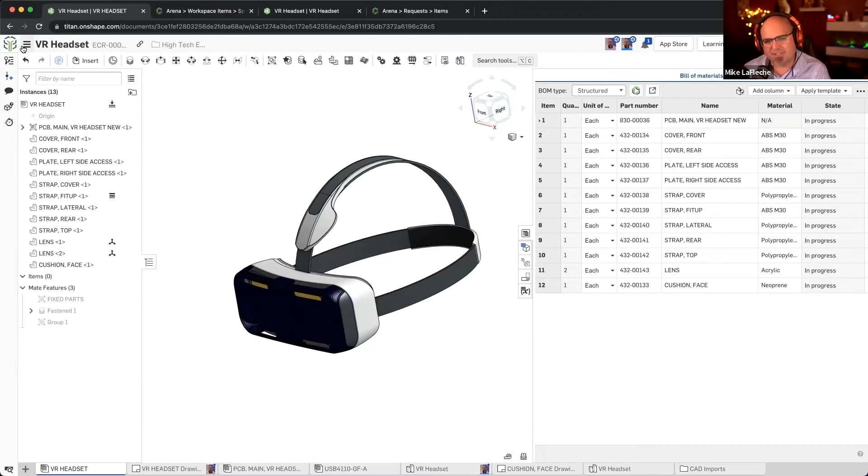There's lots of things that Onshape can do. Obviously, I gave you a very cursory overview of the system. Know that it's full parametric parts, assemblies, drawings, rendering. To get started with Onshape, it's ridiculously easy.

We have a built-in learning center where you can take courses. I'm sure, Mike, as you've learned Onshape, you've taken a look at it. You've probably gone through a little bit of this, but it's all right here.

You can take live instructor-led boot camps. All of our courses were made by people who used to work for other CAD companies, and we're assuming you're CAD people coming in, so we're not going to reteach you how to do CAD. We're going to teach you the Onshape way of doing agile design in CAD with the workflows that you saw me go through.

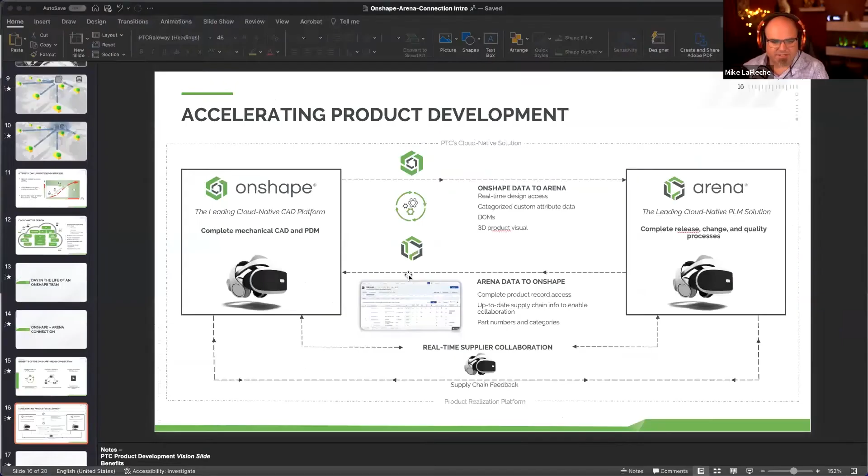It's very easy to get a trial of the product. It works on iOS, it works on Android. There's lots of things that you're going to appreciate if you give it a go. Give it a try, it's very easy to get a trial of the system and try it on your own.

You're going to be able to design hardware like software, right? You saw how I was doing the branches and the version control. That's no mistake. We do it this way because it promotes a methodology where you can get work done faster. We're not relying on the silos of files. I know many of you on the call have already implemented these kinds of processes and version control systems for other parts of your business, perhaps. Why not CAD? Well, because there wasn't a CAD system that supported it until now.

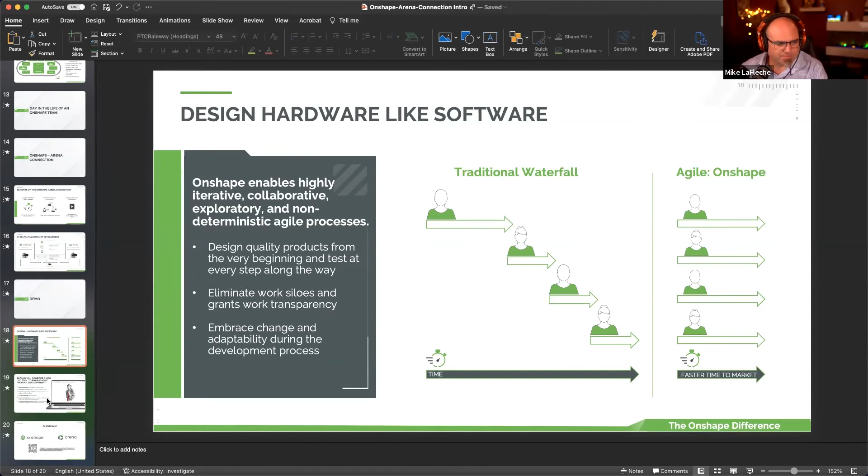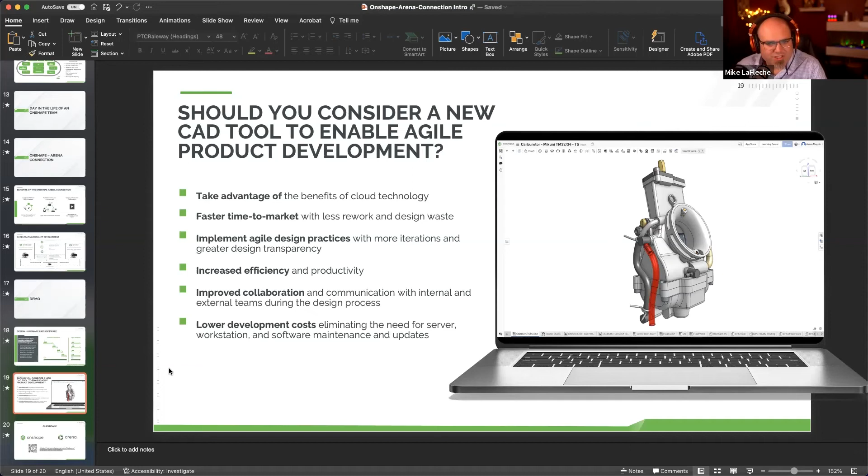So what I want to do is make sure that everybody has enough information to be curious about Onshape. That was my goal today. If you're curious and want to learn more, just think about these things on the screen. If you want to take advantage of the cloud more, be more efficient, lower development costs, you should give Onshape a go. Very easy to get started.

I'm a longtime CAD user. Used SolidWorks for 15 years personally. Been here at Onshape for 7 years. It's been a great experience working with the founding team here at the company. We love CAD, we love engineers, and we want to make their lives easier. That's why we built Onshape.

So we hope you have a lot of fun here, Mike. I hope we have a lot of common customers here that we'll talk to in the future and help increase their design productivity. And it's just going to be a lot of fun.